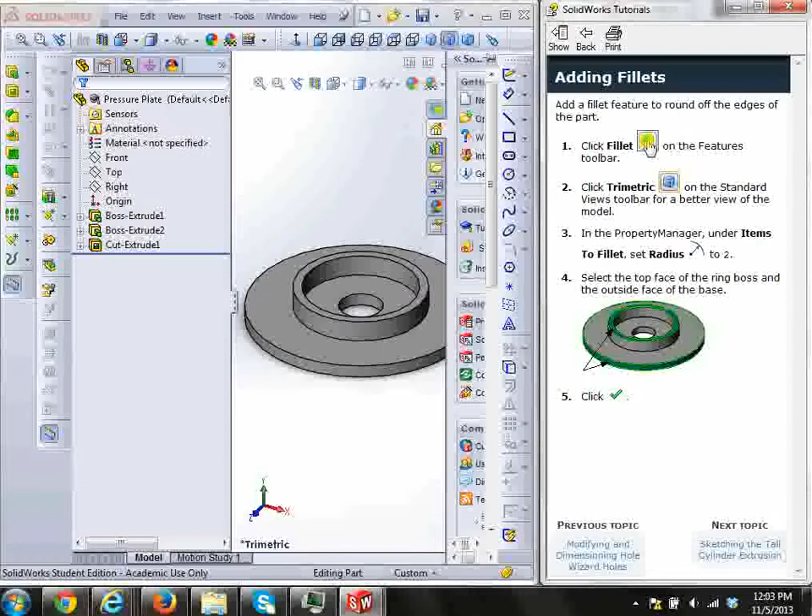Okay, you are now going on to the next section of this first part we are creating. So the tutorial is telling us to go to the fillet. So the feature fillet is where you want to go.

Don't worry about trimetric, and go to the radius of 2. Here's your radius now, 10. We make it 2 millimeters, and we accept.

After we select the two top bases, the top base rather, and the side base, just as you see here, it's green on the top. Ours is blue on my program and green on the side, and then we select check.

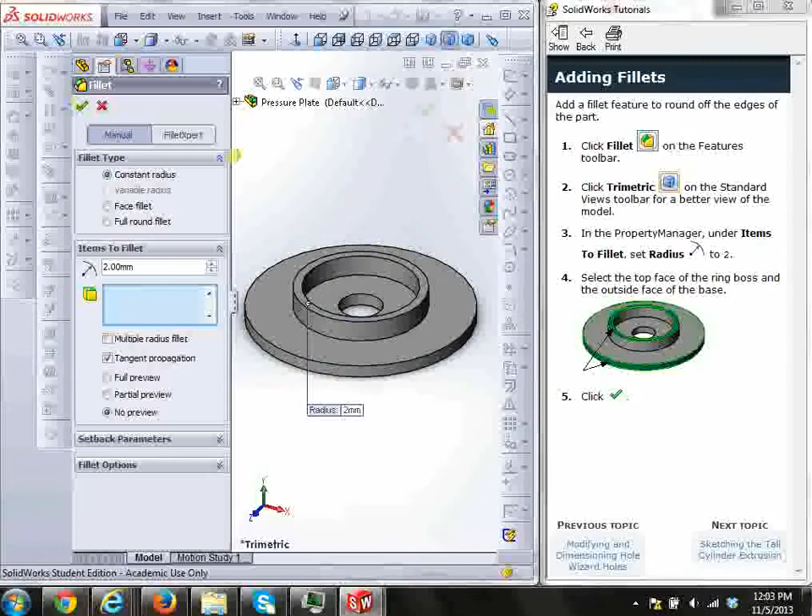The next step is on the next page, in which you extrude the base. You select the top face right here of the base. You click and make sure you're on top, and then we go to the line.

Here it's saying the fly out, which is the drop down that you may know it by, center line. It tells you the center line acts as a construction line for the next circle. It's going to keep it center of the circle and make it vertical with respect to the origin.

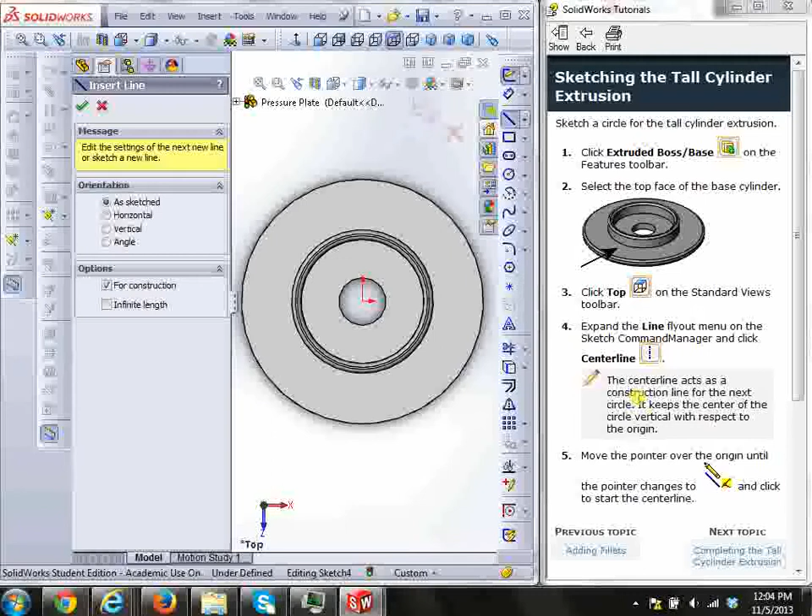So what we're going to do in step number 5 here is we're going to go to the pointer and click the start center line. Move the mouse and start the center line.

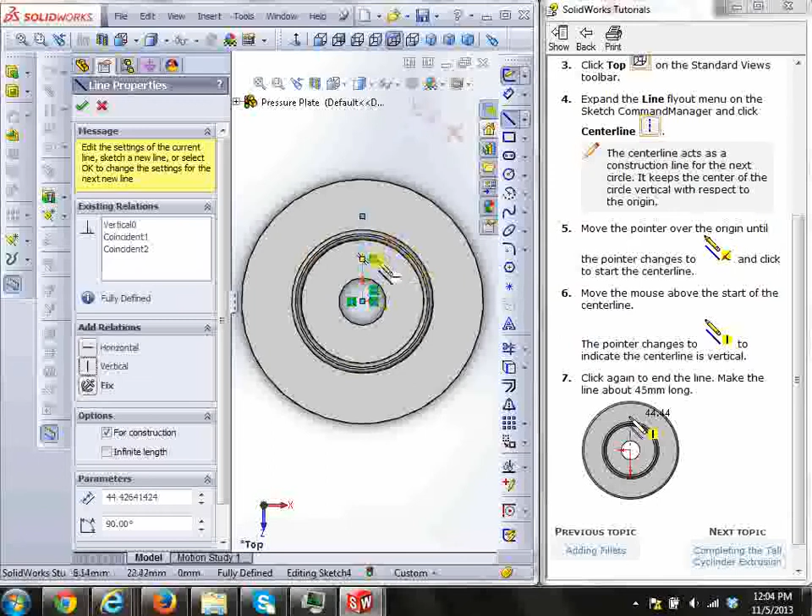And we're going to take it to 44.4. This time we're just going to go ahead and get as close as we possibly can. Select vertical, so it's vertical alignment. You see this green shows that you truly have a vertical association.

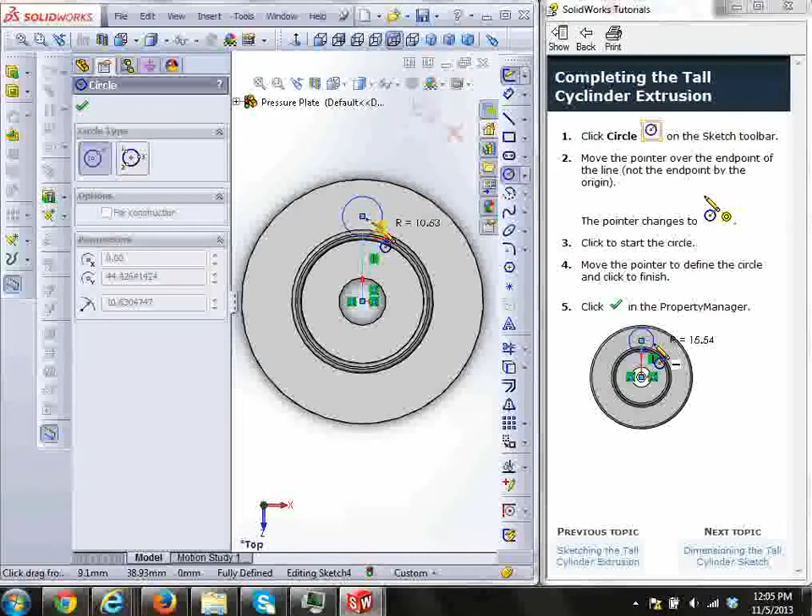Next, we turn the page and we are going to select circle. We put the tip here of the pencil, and we're going to start our circle, let go, and select accept and turn the page.

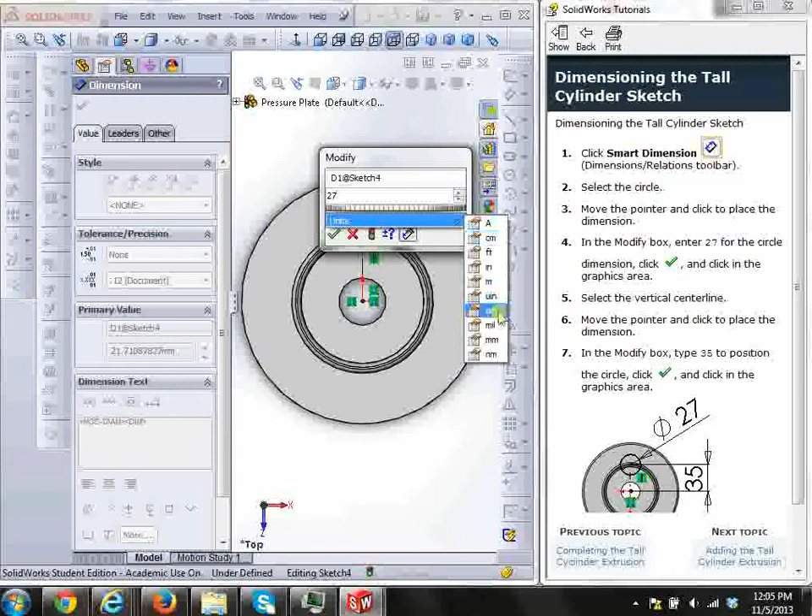The Smart Dimension tool is going to drag the circumference of the circle. We're going to double click, and at this point we put 27. The unit is millimeter. We accept our measurement and accept that we have done it correctly.

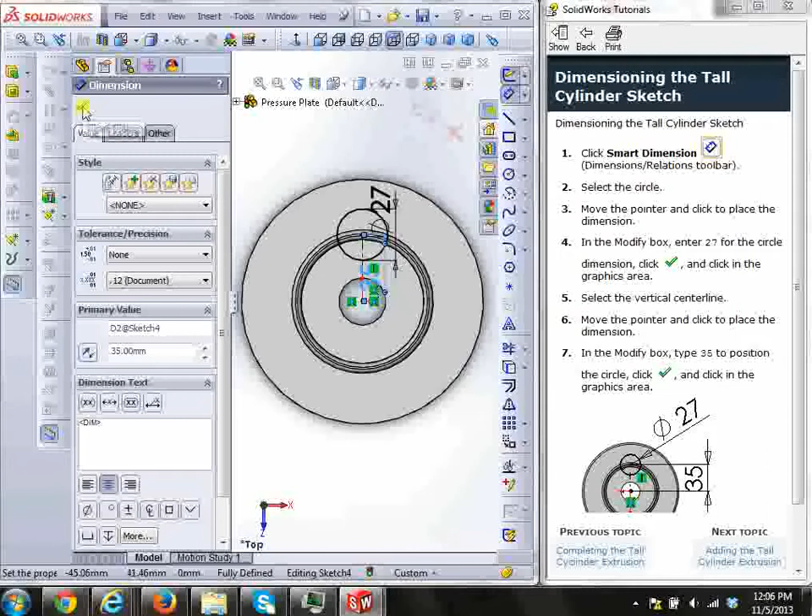Next, we want to go into the modify box. So go select your Smart Dimension and your line, drag it, click it again. Your wheel comes about. We're changing that back to 35, the units. Snap that circle right to the edge where you will need it.

We turn the page and we now follow the exit sketch. The property manager says that the depth needs to be 30. So we can just backspace the one to 30 millimeters.

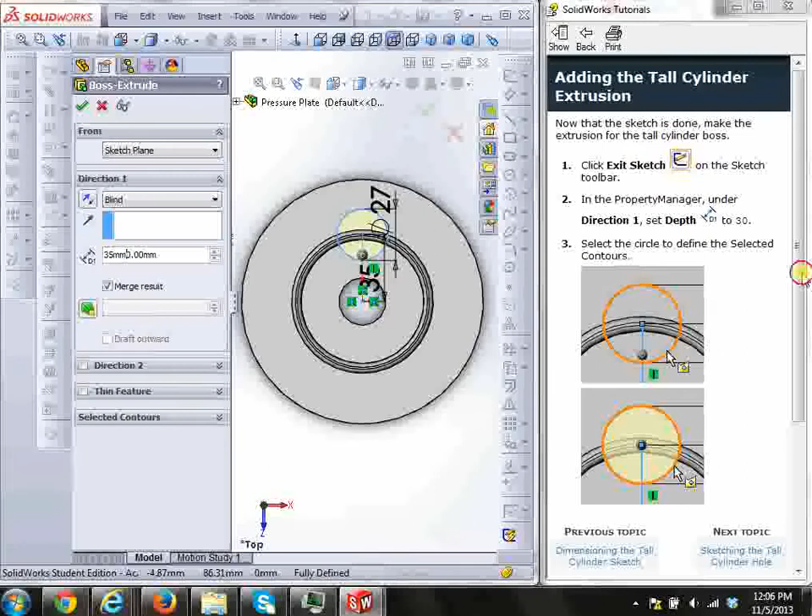And we accept. You can go to the trimetric view to see your 3-dimension version at this point. We go on to the next step.

On the next page, we do the extrude cut. We are going to make a circle, and we go on top, select circle, go from the center, and we're going to draw, lift up.

Oops, now we see I'm going to have to start over. So I select circle in the center, begin to draw, and only move without clicking with my left hand so I don't mess it up, and accept.

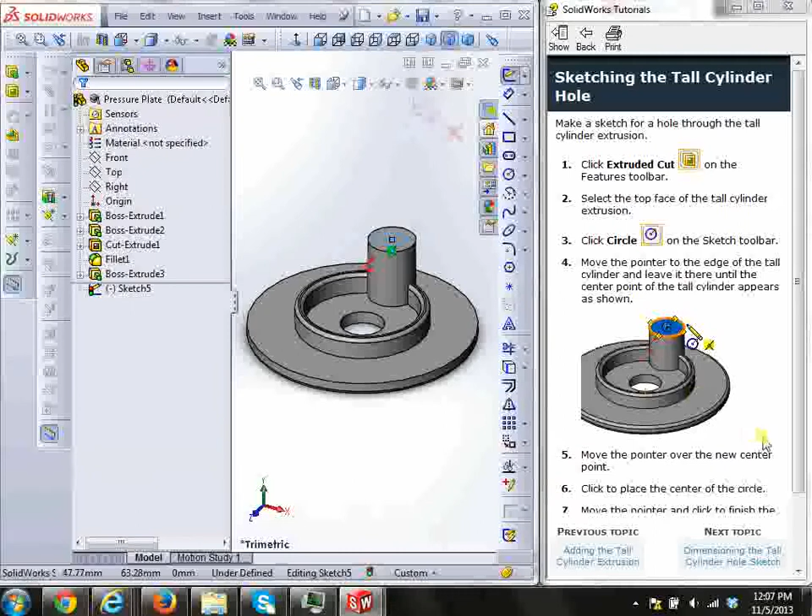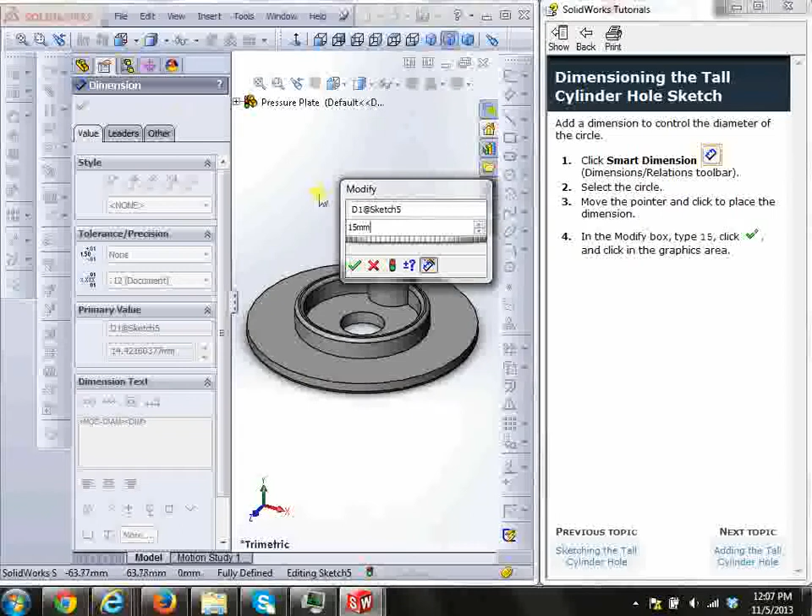Here we exit the sketch function, the property manager of cut extrude comes up, and because we want that 15 millimeters to go all the way through, see it went all the way through, we accept our cut.

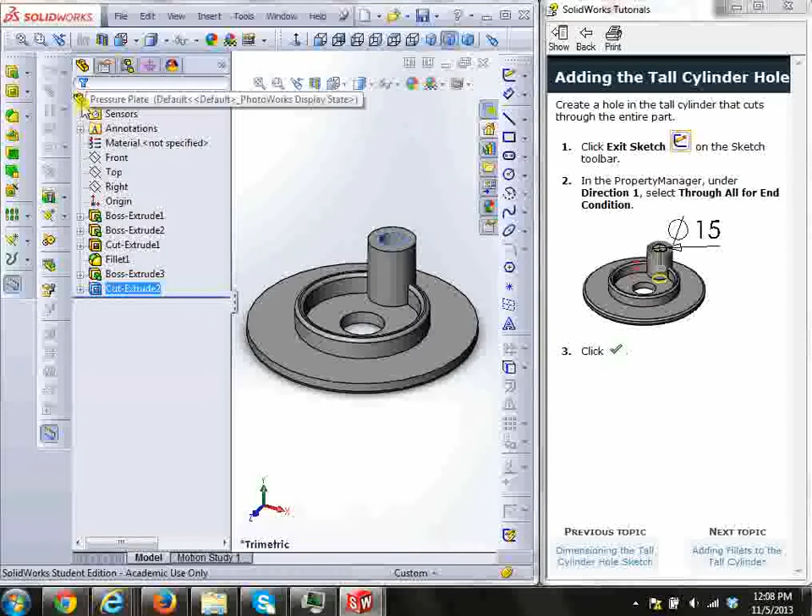Give it a second and don't rush it. Wait for it to then turn solid gray. Now we are going to this drop down box for the hidden line visible. Wait for it to come so you know you're in the right spot.

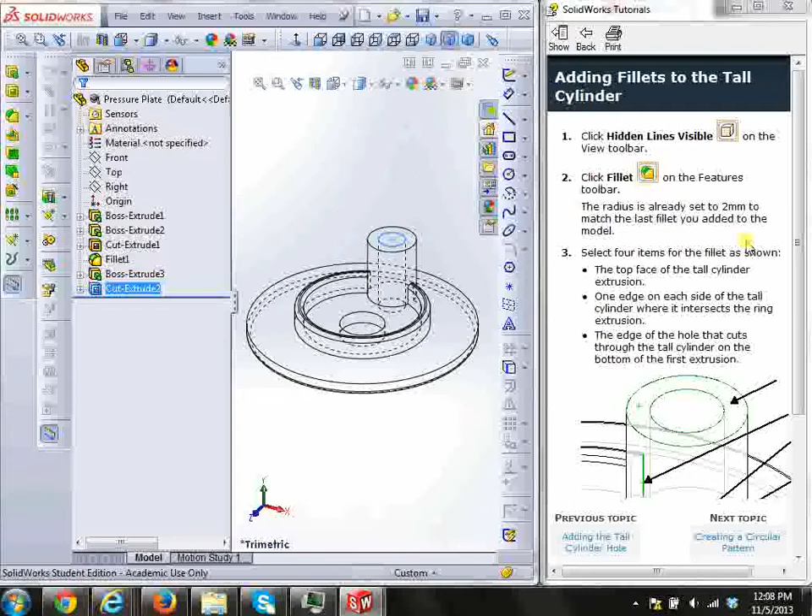Now we already set the radius to 2 millimeters, and we are to select the 4 items that will allow us to do the next step.

So let's pull the instructions down so you know. So we're selecting the bottom, the 2 top. I've got the first top, the second top. Then I want the back and the front. Making sure that we have each of the edges.

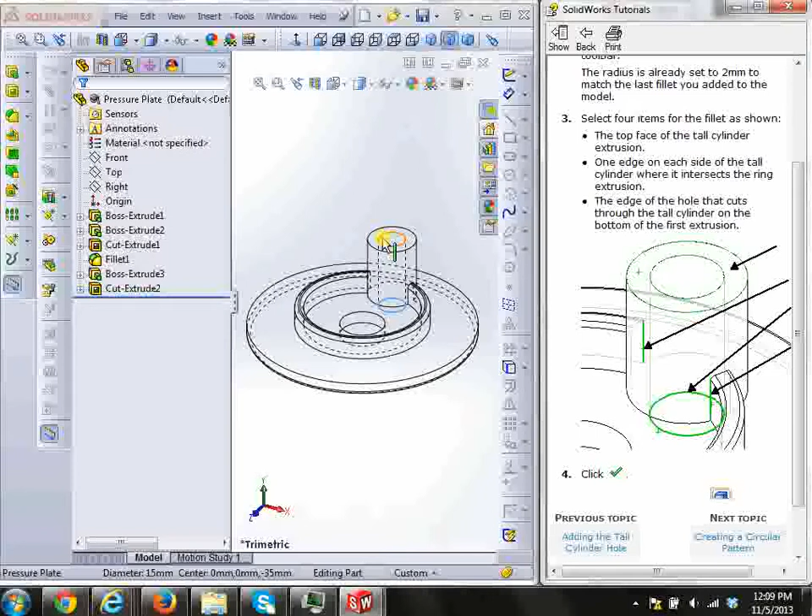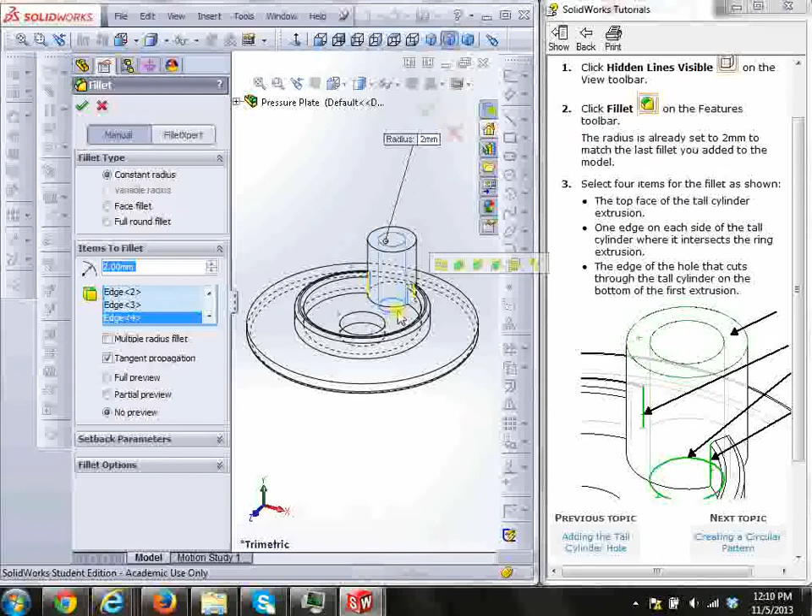Double check our fillet. We're going to that. We're going to the outer, the bottom circle. And then we accept our fillet.

And we go back to the standard shade on our toolbar. Now we're going to create the circular pattern. So at this point, we view. You may have an arrow here, so click it so you can get to view.

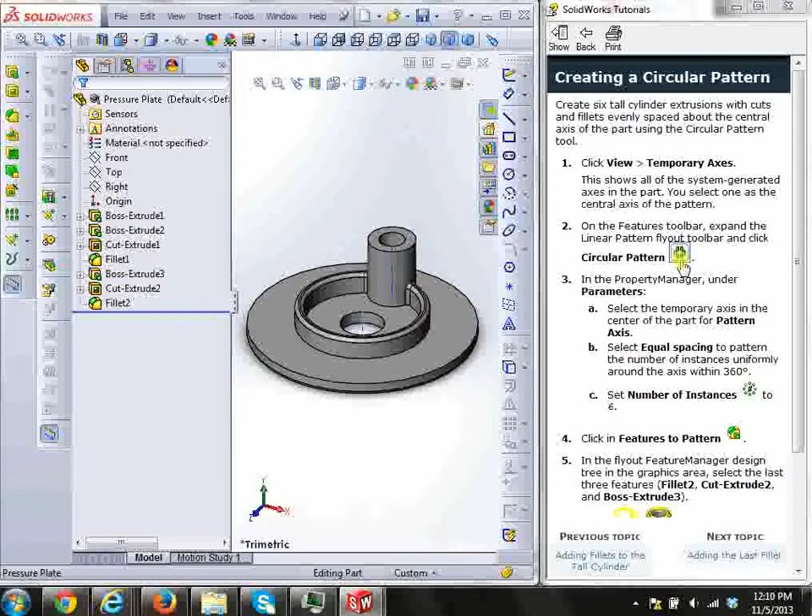And under view, the temporary axis, we are going to go to the very center of the part, so that when we go to the circular pattern, it's going to be able to rotate on the very center axis of the whole part. So we go over and select circular pattern.

Make sure it's 360 because it's going to repeat, 6, repeating 6 at equal distance.

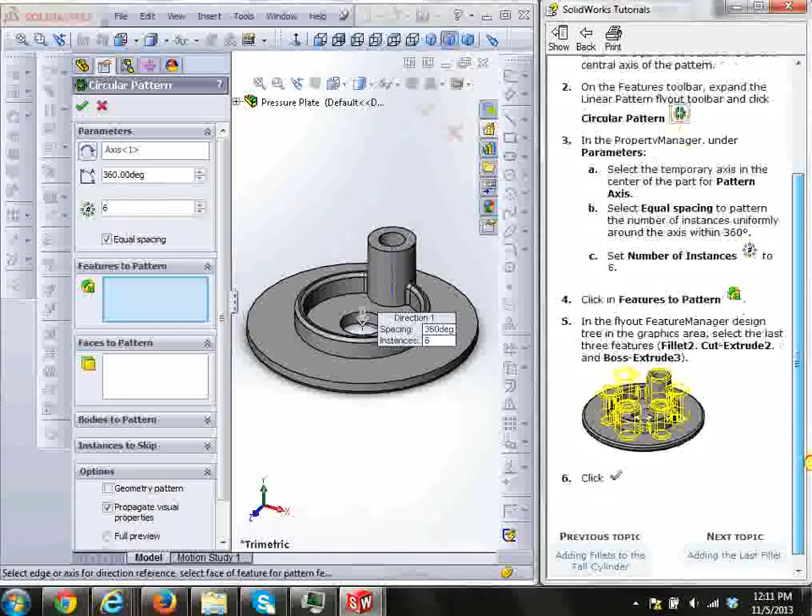Now, on the features pattern, you will need to click this plus sign so you can see all of the work that you have done. And in the feature pattern, you're going to select the fillet cut, 2.

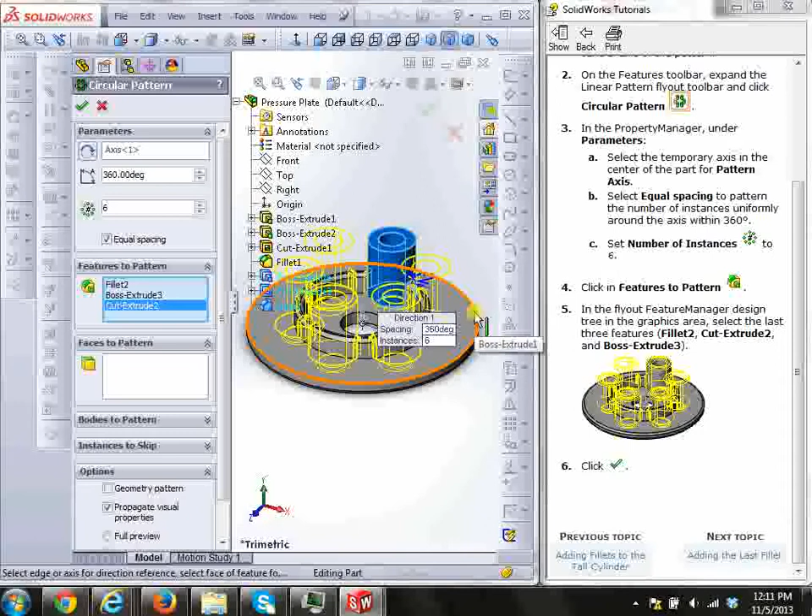And then we hit accept. Wait for it. And we have our 6 parts.

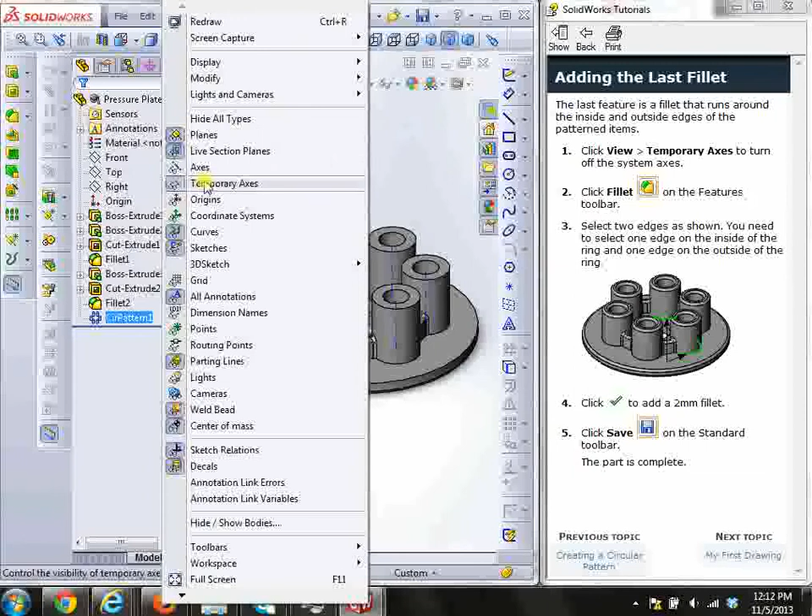Then we add the last fillet. So we're going to turn off our temporary axis. We no longer need that. We go to view, temporary axis. That is now off. And we are going to go to fillet.

And what we're going to do is select one edge on the outside ring and one edge on the inside ring.

And now we have added our 2 millimeter fillet. And we accept it. Wait for it.

Now, you'll notice that we added these 2 fillets on the top circle in our previous step. So we're going to select our fillet on these remaining edges and accept. Wait for it, and we have one left to do.

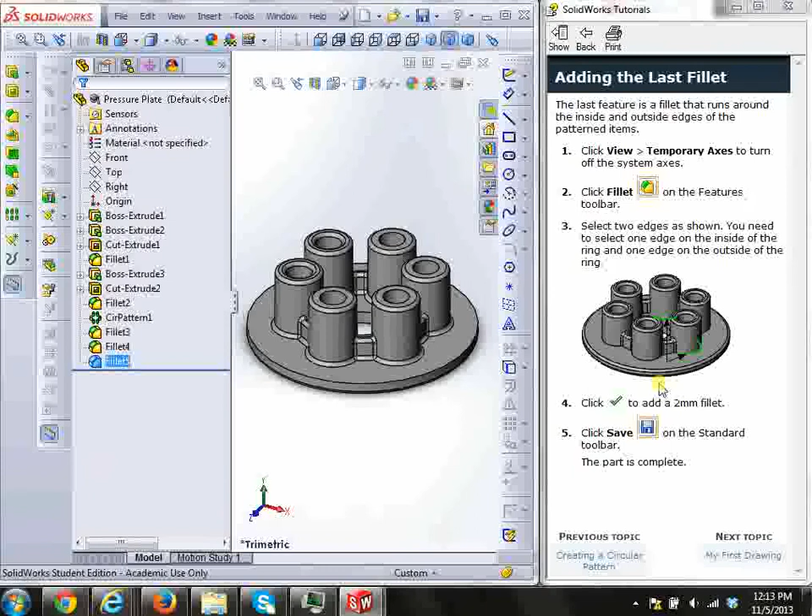So we're going to go right here on the edge, accept it, and now we have everything matching. Our 2mm fillet is all organized. We save, and the standard part is complete.

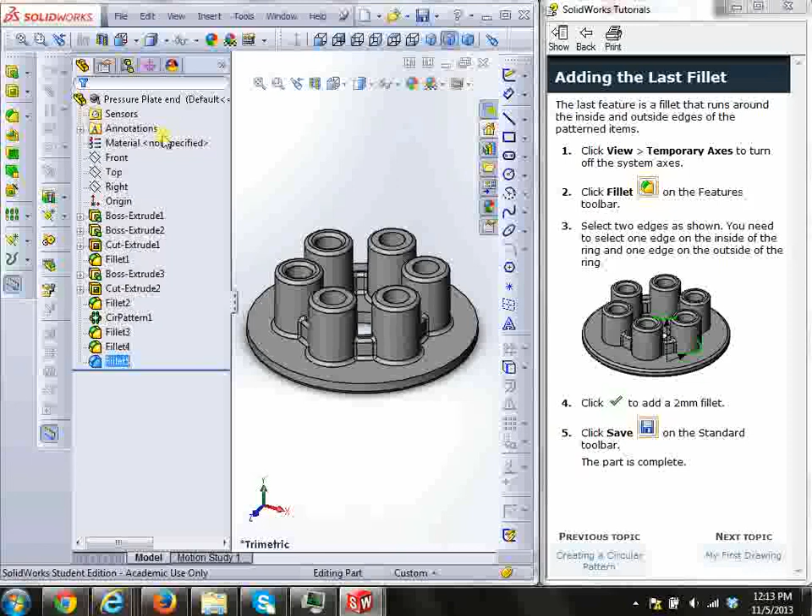So go to File, Save As, Pressure Plate, and you can type End, and you're ready for the next day's instruction to do our drawings. So at this point, we are finished.